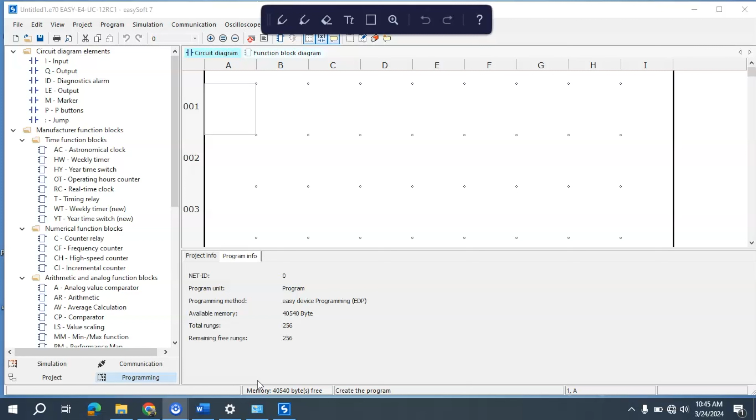Okay, in this video I'd like to talk about how to program a timer on and off delay in the EasySoft 7 program that is used for the Eaton Pico PLC. So the first thing I'm going to do is grab an input, just label this PB1. Then I'm going to come down here and grab a timer relay and drag it over to here.

And then what I want to do with this timer relay is I want to get everything set for it. So I want to make sure that this is an enable function block on status 1. This will just let it operate normally as an on delay timer. I'm going to come over here, select switch function block. I want to make sure that it's an on delay operation mode.

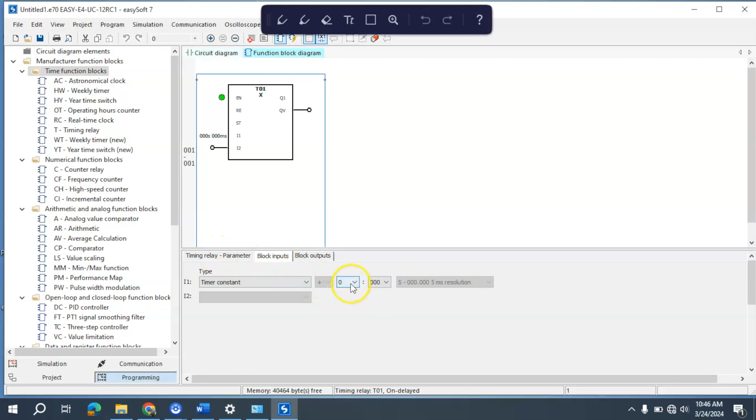I'm going to select my block inputs, and I'm going to make this 5 seconds. Now I'll come here, I'll select 5. You can see here this is 5 seconds, and if I needed 5.5 seconds or something like that, I could select that range right now. So if I needed 5.5 seconds, I would come here, 5.5 seconds.

If my timer needed to be much longer, I could change my resolution here to minutes and seconds. Then I can come to my block here. I cannot do a half a second. I could just leave it at 5. I could go 28 minutes and 5 seconds. Basically, whatever amount of time I need, I can create a timer for that. So we'll just leave this at 5 seconds.

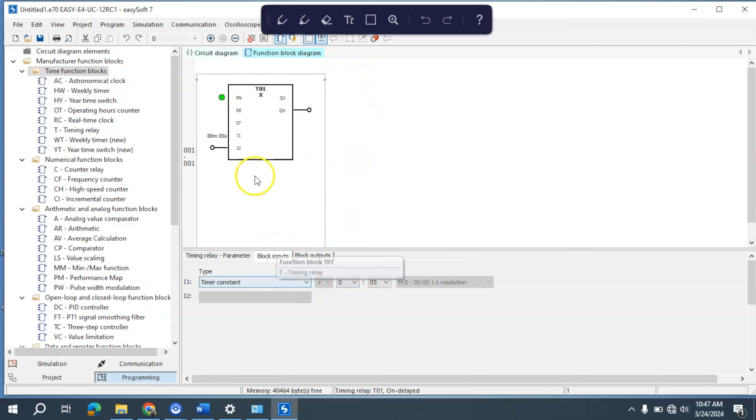Then go back to my program mode. The timer should be set, so I'll go ahead and connect the logical path here. So when this push button goes true, the timer will start timing, and this will delay something turning on. What is it going to delay turning on? Well, a contact off of that relay.

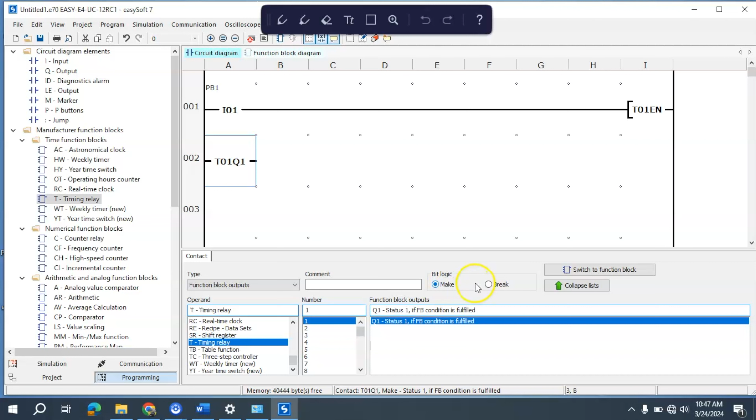So I'll select this timer right here, make sure that the status is good, make sure my bit logic is on make since I want it to close or become true when the timing function is done. If I wanted it to be the opposite of that, I would put a break, and then I'll just grab an output here and make that logical connection here.

Now I can go ahead and simulate this and see if it works. Hit the play up here and then select push button 1 to turn on, and then 5 seconds later you can see that the timer input went true, activating the output. And this is how an on-delay timer works, and this is how you program it in the EasySoft 7 program.

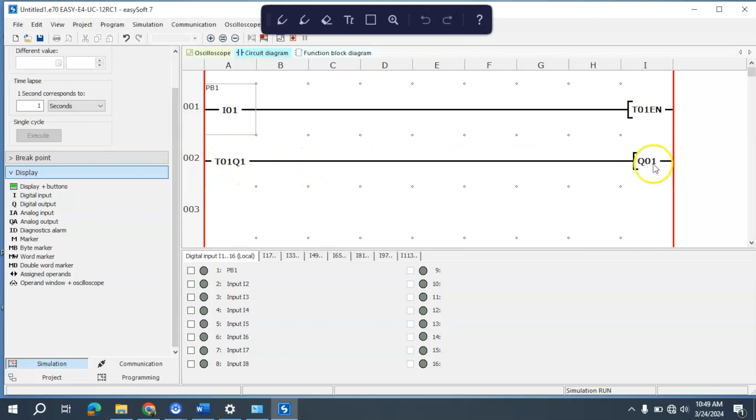And just to run this one more time, you activate this, this goes true. 5 seconds later, this input goes true, activating this. Now, when I release that push button, let's say it's a selector switch that I put in there, this will stay true until the timer coil up here is turned off. So I will deselect this, this shuts this off, deactivates that contact off of it, and turns off the output that we have assigned to that timer input.

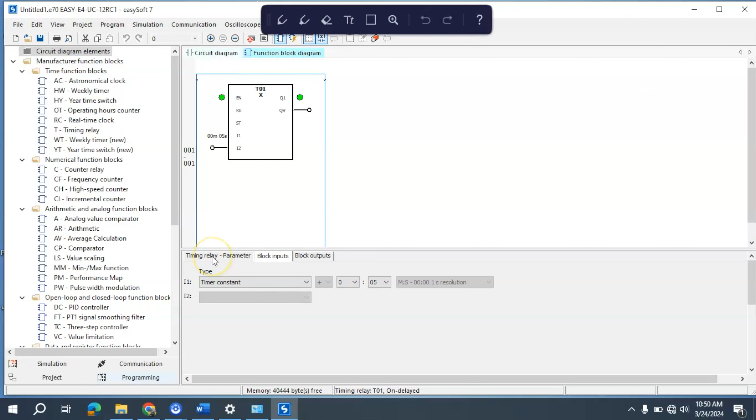Now, let's see how an off delay works. It's the same timer relay. I would drag it over here, but the difference is I would come to the switch function block characteristics, go to the timer relay parameters, select off delay. Now, this will act as an off delay, and there's a big difference between the on delay and the off delay.

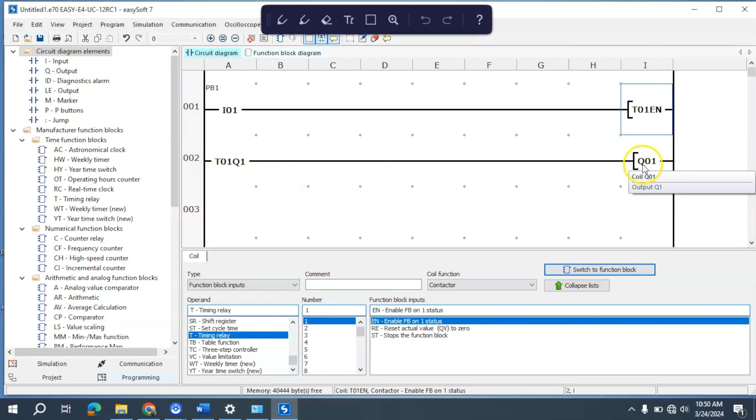The main thing that confuses new students is that with an off delay, its normally open contact will go true as soon as this is turned on, and it will delay turning this off by whatever time you put in the preset. Let me show you. Come here, hit the play button, activate this. Now, right away, my timer goes true, the contact closes, my output is turned on.

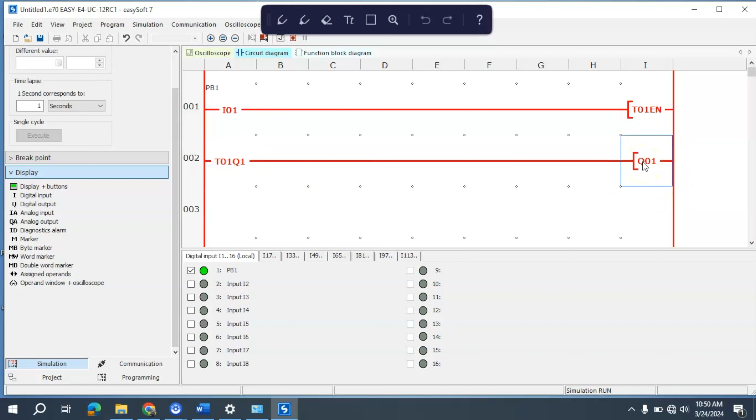It will stay true until I come and deactivate this push button. Then, after 5 seconds, because that's the amount of time I put in the preset, it will go off. Let me show you again. I activate it, it just goes on, and it will stay true for as long as you need it. Then when you deactivate it, it delays the off from going off for 5 seconds. I know that's a little confusing to say, and I messed it up right there, but that's how that works.

All right, and that's a quick introduction to how timers work in the easySoft 7 program.